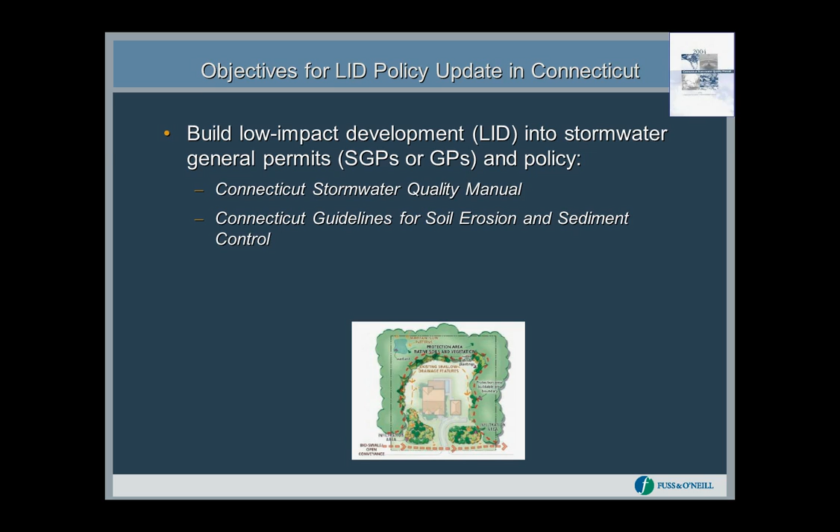The Connecticut Department of Energy and Environmental Protection wanted this to be a partner-driven process. It was very important to them that the folks in the regulated community were well aware of what the standards were, how these standards were going to get implemented, and that these groups of folks were essentially on board with what was going on.

The first task in this process was to develop a list of partners. We developed a list of over 50 diverse statewide partners to work with the Department of Energy and Environmental Protection to review and incorporate low-impact development into their stormwater general permits.

The reason they were focusing on a wide, diverse group of partners was experience that had happened in a couple other states, particularly on the West Coast—California, Washington—where it had been attempted to bring low-impact development into general permits and statewide standards, and there had been serious objections from the regulated community, in some cases threatening lawsuits. So Connecticut was working to avoid that problem, essentially short-circuiting the issue before it starts by working with partners up front.

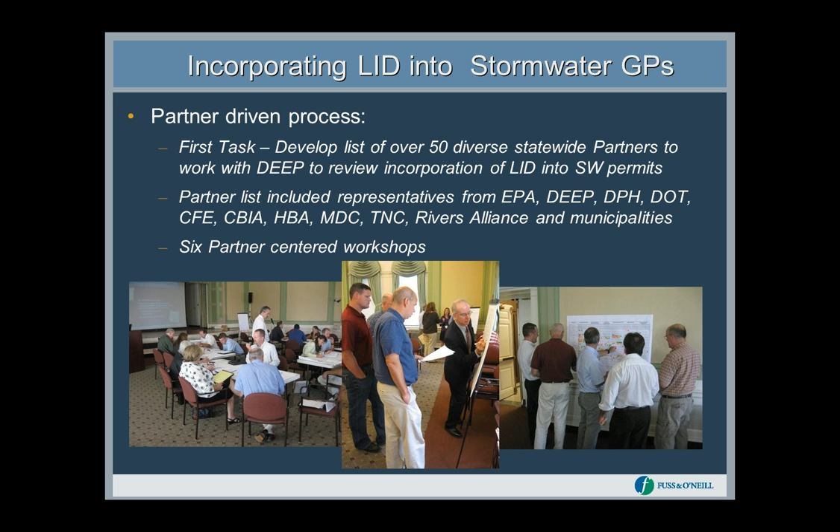We also included all of our deliverable products for the project on this web page, and this way it was very easy for the Department of Energy and Environmental Protection, before a workshop or at the end of a workshop, to send out an email to each of the folks who had been involved, each of the folks on their partners list, saying there's new information that's been posted and you can find it at this location. People could easily download it and, of course, make comments back to the department.

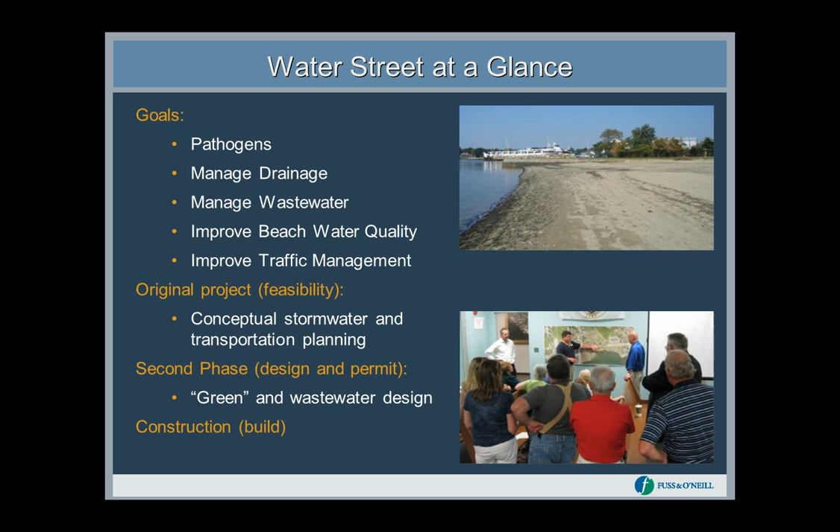But through this process, I think we probably came up with a better design approach. We worked closely with neighborhood folks in the area to really try to come up with an approach that would work well for them in terms of managing traffic and using stormwater infrastructure that would be aesthetically pleasing to them.

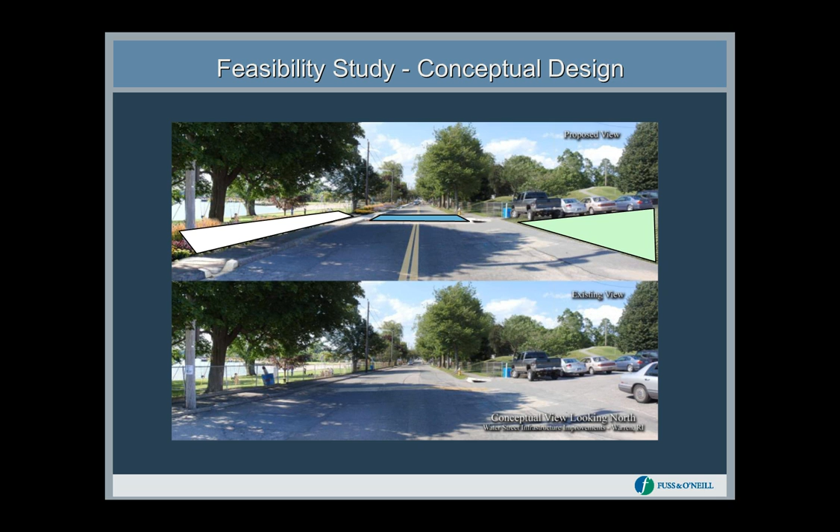Financing for Water Street. An important aspect of any project is, of course, being able to come up with financing for it. As is the case with most municipalities, the town of Warren, Rhode Island was not made out of money and needed to look to external sources to potentially gather some funding.

The initial stormwater, or wet weather and dry weather, studies that we did that identified the sources of pollution were funded directly through the town. Those amounted to about $20,000 up front.

The town was then able to leverage an existing non-point source grant, or a 319H grant, that they had, and reprogram it to work specifically on this project. It had actually been taken for another purpose, but it was close enough to this that they were able to reprogram it. We developed a feasibility approach that we reviewed with the town staff and later the neighborhood in charrette-style meetings. Ultimately they were able to take the results of the design work and bring that to the Rhode Island Department of Environmental Management and request an SRF loan.

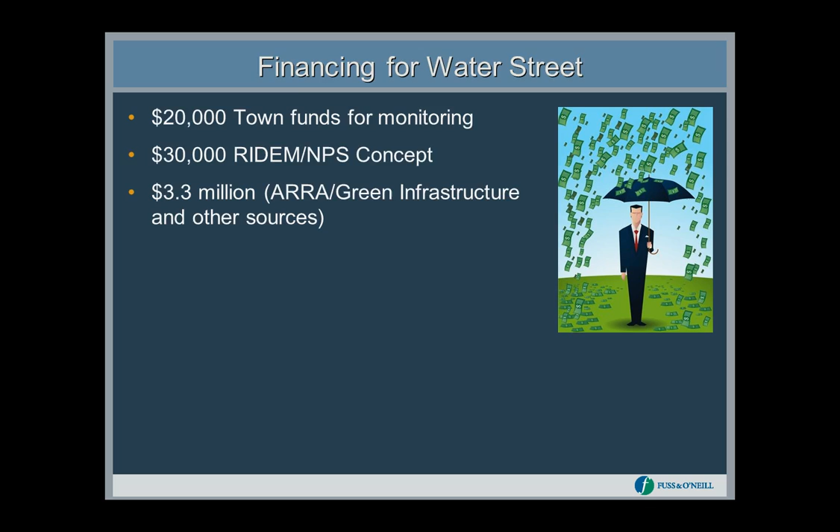A couple of key points about what made this project attractive to funders and to move forward with the town. First, a clearly documented pollution problem—all that work we had done up front, sampling and determining the sources, really made this an easy-to-explain project to the general public and to potential funders. Second, the importance of the water resource in this area: this is a town beach that had experienced significant closures, an area folks wanted to restore to its original or desired quality.

A clear implementation approach: we developed plans and designs up front that we were able to show people, showing exactly what it was that we wanted to do and when, and the kind of buy-in that we had on the project.

Demonstration of low-impact development for a green street. This is actually one of the very few green streets that have been implemented in the New England area. I believe it'll get built most likely this summer, and I believe it'll be the second one in New England overall. Demonstration of this kind of approach was something that I think was very attractive to funding agencies.

And then general agreement amongst stakeholders: we spent a lot of time working with the neighborhood, working with state and municipal authorities, and also with the Native American constituency in this area, as well as federal groups, to make sure that everybody was on board with this and that it would be a successful project.

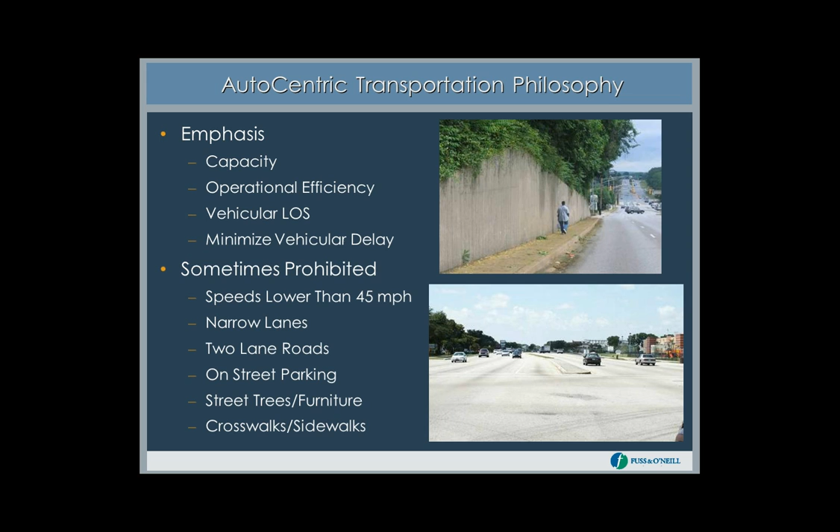So how have we started getting back to it? Well, the public has spoken, and people want to live in walkable communities. They want walkable areas. Our guidelines, a lot of the state and local design guidance did not allow that to happen under design standards. So what we've now done is, through the efforts of collaborations such as the ITE and Congress for New Urbanism, we've come up with sets of guidelines that are specific to these walkable urban areas.

Whenever we try to apply highway standards in these urban areas, we fail miserably from a people standpoint. We do a great job in moving cars, but that's pretty much all. So a few years back, Institute of Transportation Engineers and the Congress for New Urbanism got together and decided to develop a set of guidelines that really go toward helping us build walkable facilities in more urban areas.

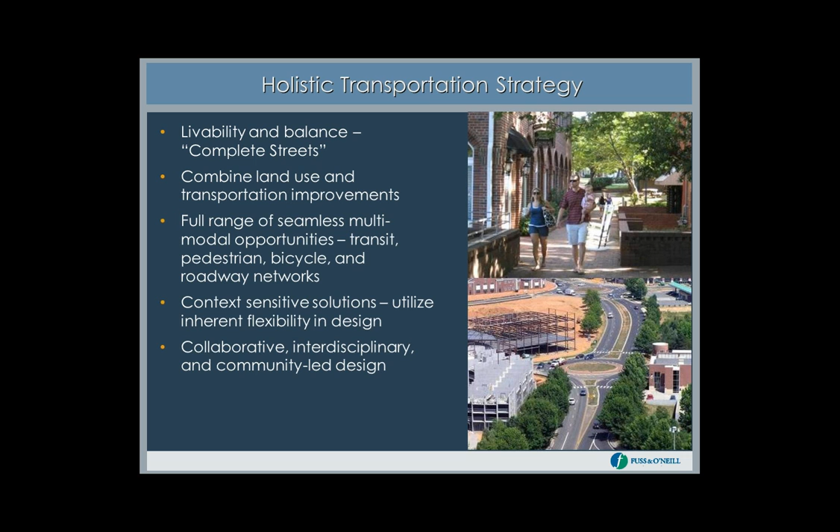So whenever we boil it down, complete streets really are about respecting the overall context. They're very well connected, not just from a roadway network standpoint or connectivity for one mode, but connectivity between modes, really wanting to eliminate those seams if we can. We go beyond the travel lane, beyond the pavement, think beyond the curbs, and start to identify these different realms and tailor them to each of the users, whether motorized, non-motorized, walking, biking, or buses, making the interfaces between all of those much more seamless.

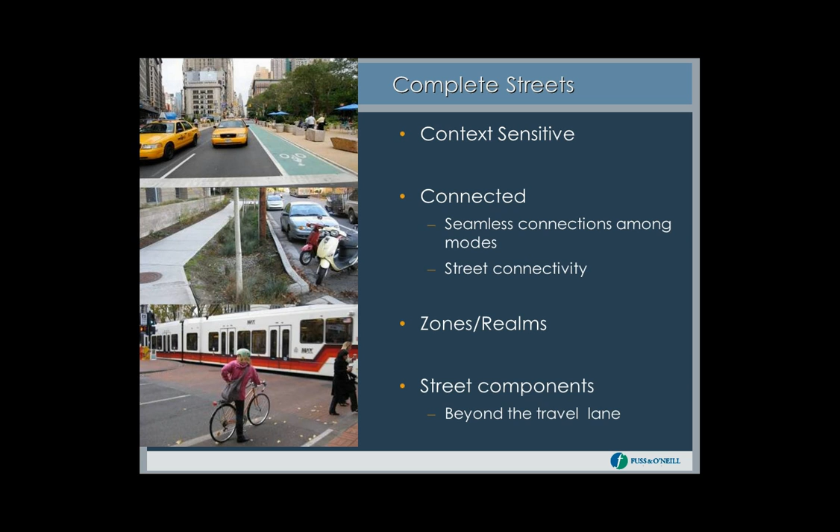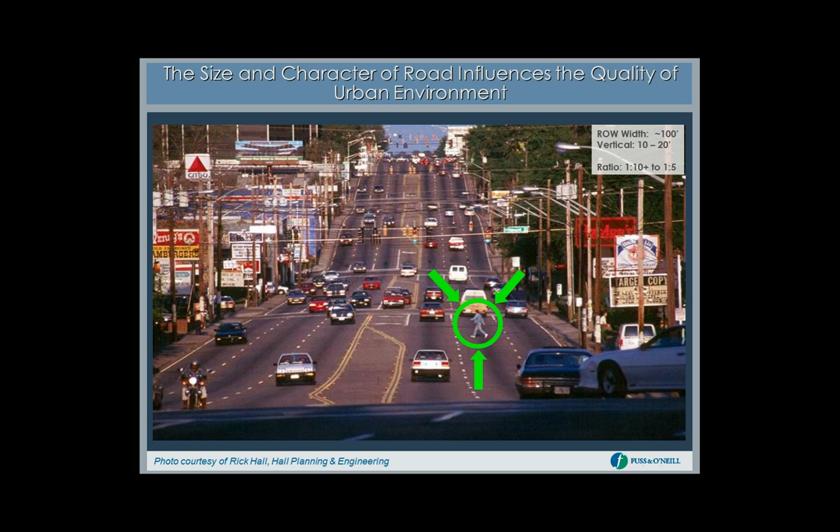One of the other things we start to look at within the component of a street is how people feel comfortable on a street. It really is about getting the vertical and horizontal distances correct, because people want to feel enclosed. By addressing the height of the land uses on the street edges and making an appropriately sized street, you can really start to make people feel a lot more comfortable within the space.

We're doing a lot of this through integrating the transportation engineering along with the land use in the realm of form-based coding as well.

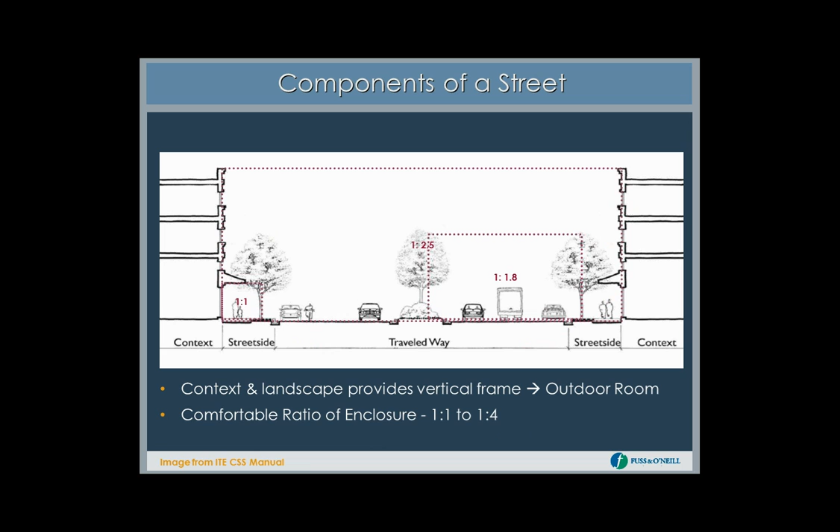And again, it really does come back to respecting the overall context. A road in a very rural area should and will be very different than one in a much more urban area. It's not to say that one can't adhere to the principles of complete streets, because they certainly all can. It's just how you meet those criteria can be different depending on where you are within a transect.

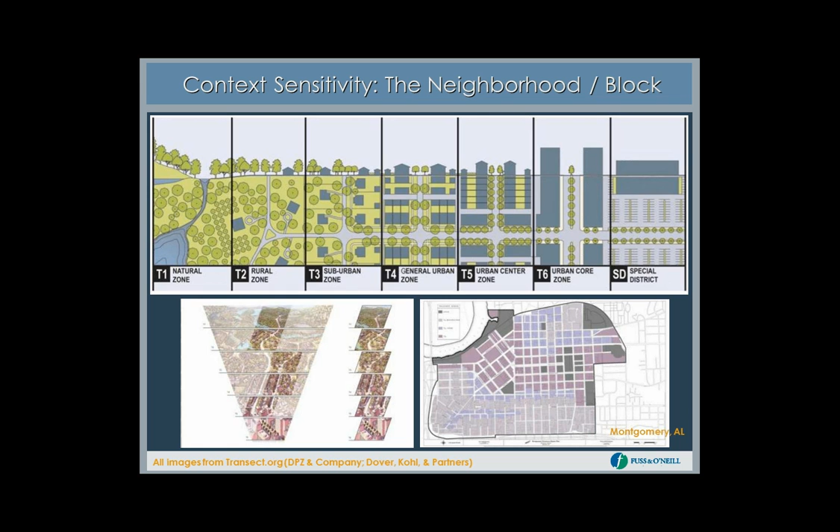Some of the ways that we're actually able to integrate and implement these kinds of streets are through land development ordinances and form-based codes. We actually code street typologies right into a lot of our code work, so that these different typologies really do respect and respond to the overall built and natural environment. We definitely go beyond the arterial, collector, and local street functional class, looking at many tailored classifications of roadways that have flexibility built in for the land uses adjacent to them, but all of them incorporate principles of walkability and complete streets as well.

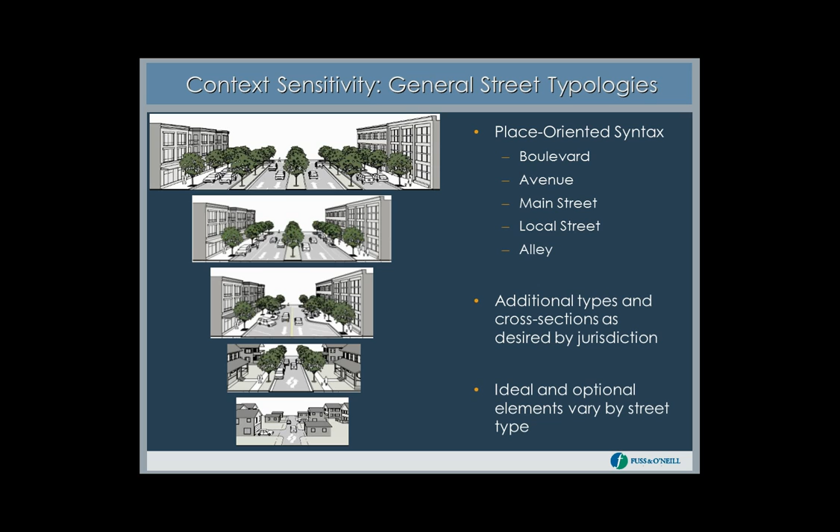So again, really looking at the different zones on the street side to be able to provide those spaces as well. We make sure the street side spaces are built right into the design because we look at the overall holistic streetscape. We define these zones: a transition zone from the vehicle space to an amenity and furnishing zone, to the walking zone on the street side, and then to a frontage zone where people can shop or dine outdoors and interact with the rest of the community.

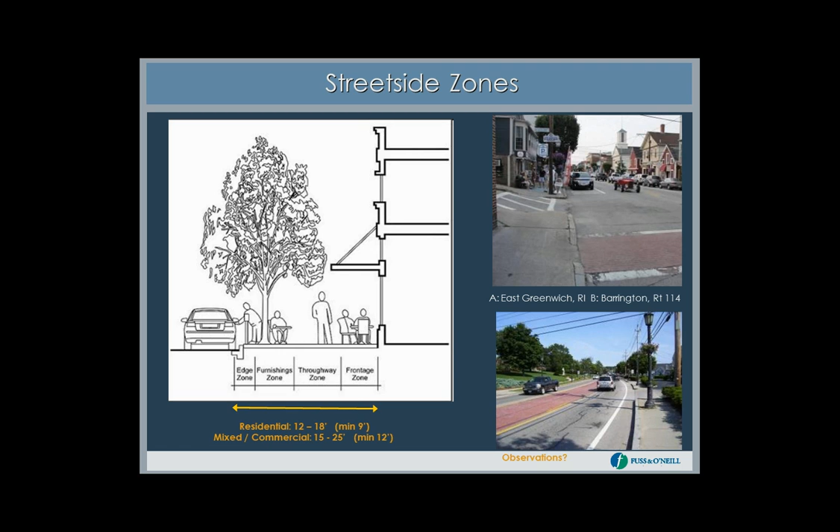But to do that, we have to make sure that we are inherently walkable and that we're not creating conflicts between motor vehicles and pedestrians. We want to make sure they're as safe as possible, and that within these zones we provide for closing those gaps between walking and motor vehicles and other modes of transportation.

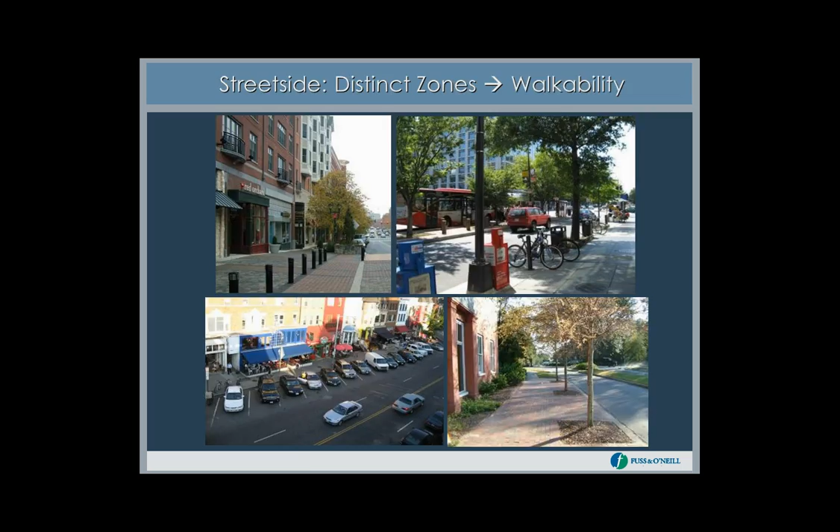One place that we've really come a long way in the past few years is through our design of bike facilities, recognizing the bicycle as not just a recreational mode of transportation, but a viable form of transportation for commuters as well. Some guidance we've recently received is from the bikeway design groups at the National Association of City Transportation Officials, NACTO. If you haven't seen the NACTO Urban Bikeway Design Guide yet, check out their website because it gives us great guidance on the range of facilities we can incorporate.

It really does go beyond bike lanes and signed routes. We can now use sharrows. A lot of cities are starting to experiment with cycle tracks, and it's cities outside the rarefied airs of Portland, New York, and D.C. Even smaller cities are doing that, and we're finding ways to reallocate assets such as drainage corridors or utility corridors to create more urban multi-use trails.

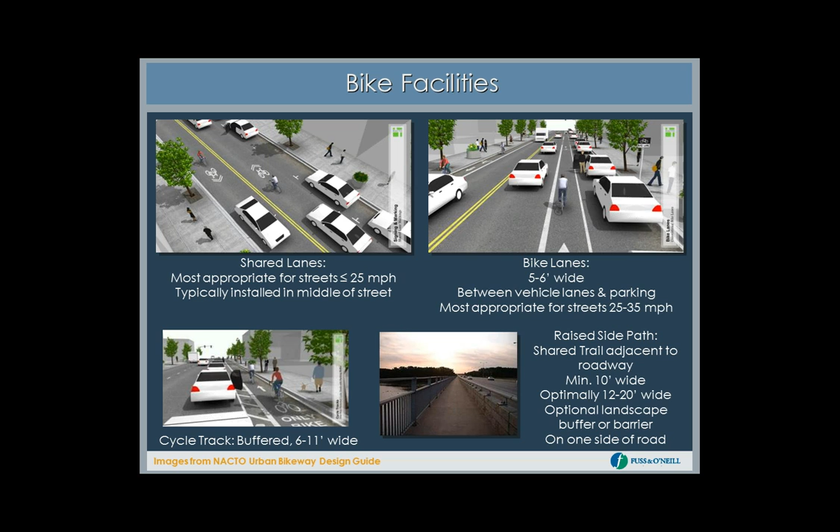We've also changed our thinking somewhat with regard to vehicle travel lanes. It's interesting that traffic engineering is one of the only math-based sciences where 1 + 1 does not necessarily equal 2 — a 4-lane road cannot carry as much traffic as 2 separated 2-lane roads. This allows us to explore things like the 4-lane undivided to 3-lane divided road diet, with similar road carrying capacity, much higher safety, and the ability to reallocate that pavement asset for other uses such as bicycles. By reducing lane width, we can also reduce speeds.

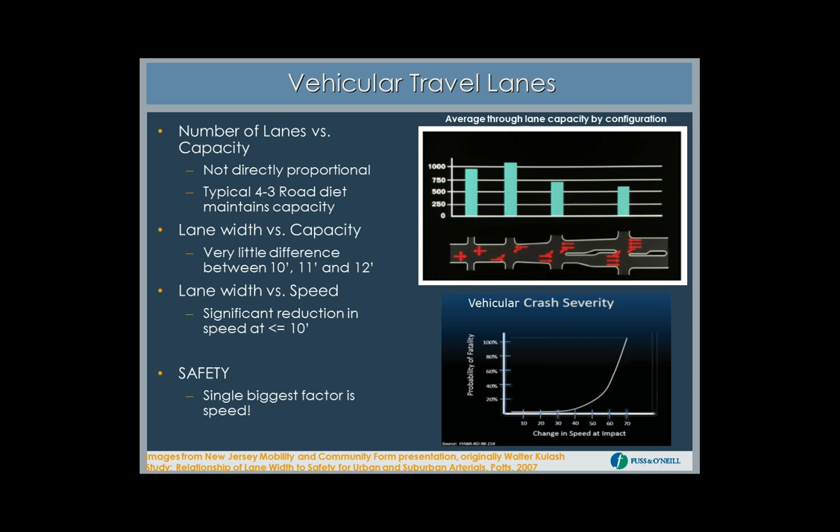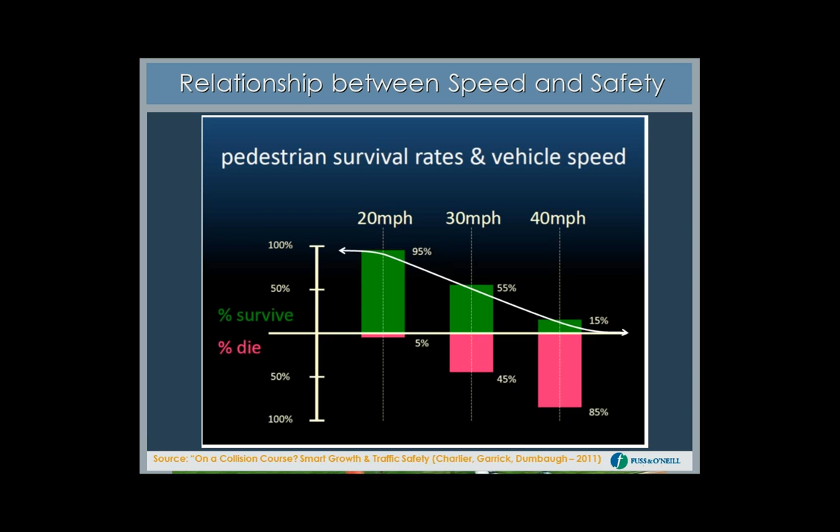Whenever we get down to the safety factor, the biggest issue is vehicle speeds. As a pedestrian, if you're struck by a vehicle at 20 miles an hour, you have about an 85 to 95% chance of survival. That drops to 15% when you double the speed of the vehicle. It's kind of like Usain Bolt running right at you in lane number 4 and running right over you — you can imagine what kind of collision that would have.

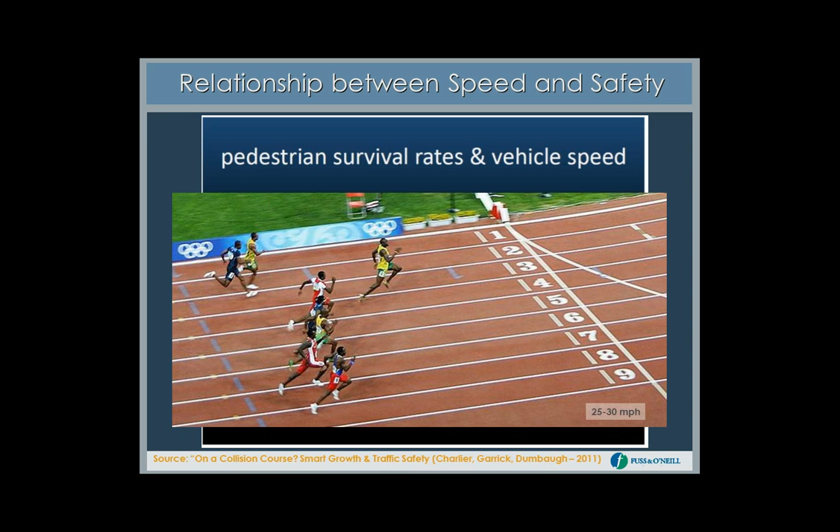Another element of complete streets is the idea of getting medians, landscaping, and streetscape — golden opportunities to dovetail into more green streets principles like rain gardens, bioretention, and bioswales, and we're seeing that kind of use started in a lot of places.

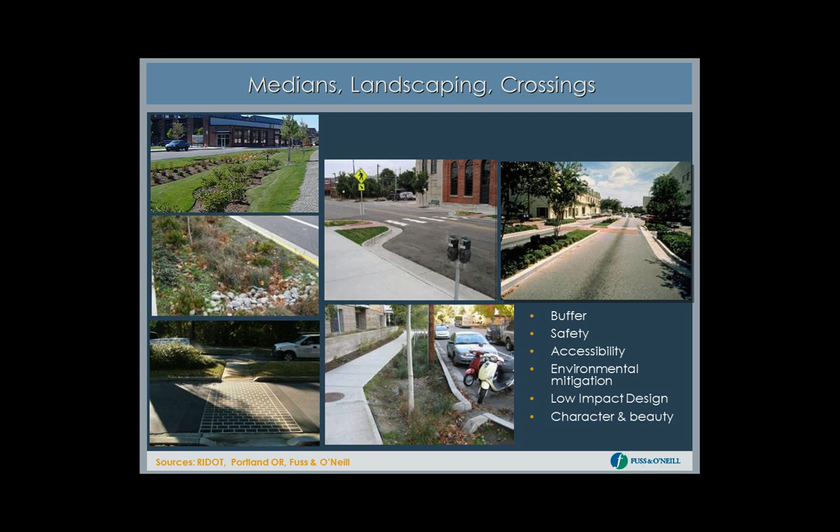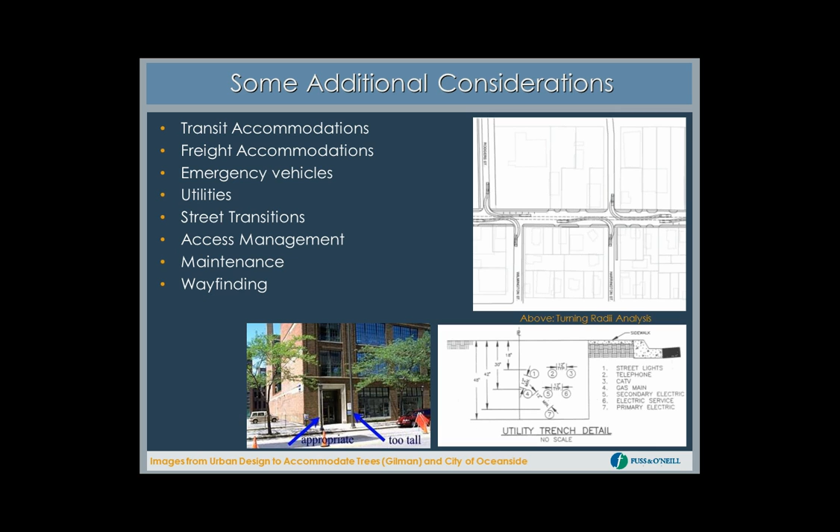We want to make sure we accommodate all the other issues — transit, freight, and certainly emergency vehicles. Fire departments are learning that they can downsize vehicles and get more multi-use to serve some of these areas. We also make sure to handle our transitions, understand our maintenance, and make sure people know where to go with wayfinding. One way we put it all together is through coding, and when we combine all these elements, we can come up with really, really great streets.

So who's actually doing it? I'm showing some slides here of some unusual suspects. Charlotte is generally recognized as one of the leaders in doing complete streets. But certainly New Haven, Connecticut is taking it to the nth degree, actually taking down a freeway and reconnecting the street grid with the Route 34 downtown crossing project.

Some other larger cities haven't necessarily been known for walkability or complete streets. Memphis, Tennessee is really becoming one of the forerunners of this bicycling movement. Memphis is on track to be one of the first cities in the southeast to do a cycle track project — a two-way cycle track connecting their largest urban multi-use trail to their signature Midtown park, Overton Park.

Then there are some unlikely candidates. Russellville, Arkansas, a small town of 20,000 about halfway between Little Rock and Fort Smith on the I-40 corridor, is actually doing a complete street project to connect their university with downtown on the heels of a downtown master plan. That would be a cycle track using the separators from the travel lanes as rain gardens to assist with stormwater.

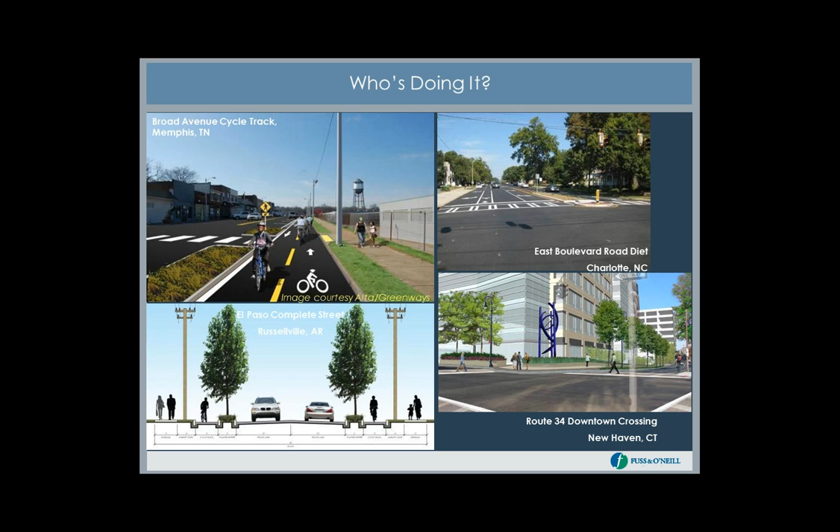So how do they get it done? Some of the funding sources available — a lot of places we're working with are using things like tax increment financing, business improvement districts, targeted sales tax, or even local option sales taxes to do these kinds of complete streets pieces. Voter-approved bonds are certainly a mechanism by which Charlotte does most of theirs.

There are private foundations, such as Bikes Belong, that offer both financial and technical assistance to communities trying to do these kinds of things. There are also federal grants and funding programs, and one thing we're seeing is communities using local funding sources as leverage for matching federal grant application requirements. Finally, public-private partnerships on larger scale development-driven initiatives are certainly ways to get that done.

So it's an exciting time to be a traffic engineer working in complete streets. I appreciate your attention, and I look forward to any questions. I'll turn it over to Caren.

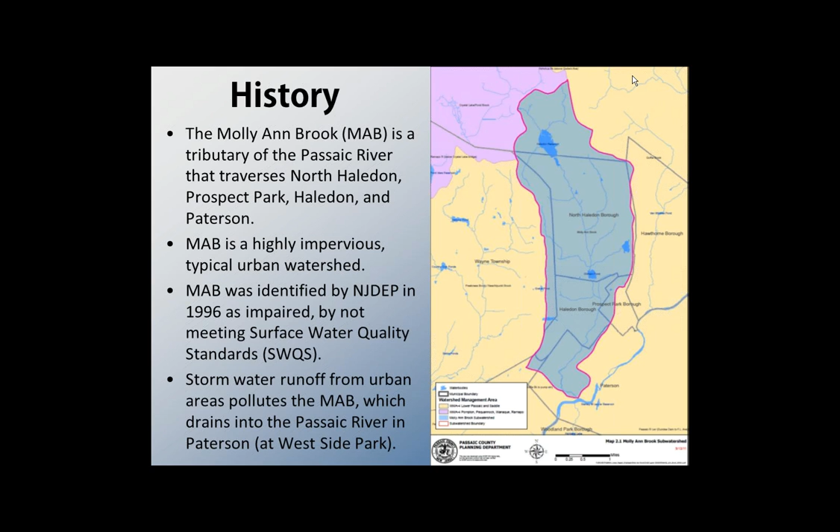So the question: can the Molly Ann Brook be improved? And the resounding answer is yes. The watershed management plan identifies several best management practices, and we decided to implement two of the non-structural ones. The goal was to enhance, protect, and restore the surface water quality of the Molly Ann Brook and its tributaries.

So the two non-structural best management practices we chose were funded after the management plan had been approved by the New Jersey Department of Environmental Protection. We applied for another 319H grant - that's Clean Water Act funding - to purchase rain barrels for distribution free of charge to residents within the Molly Ann Brook watershed.

As you know, rain barrels capture rainwater that would otherwise just run off the roof and into the storm drains and then eventually into the waterways. It's non-potable water, but it can be used for watering your lawn or garden, washing your car, washing your pets, or other uses. I've used my rainwater at home to mix cement for a small cement job.

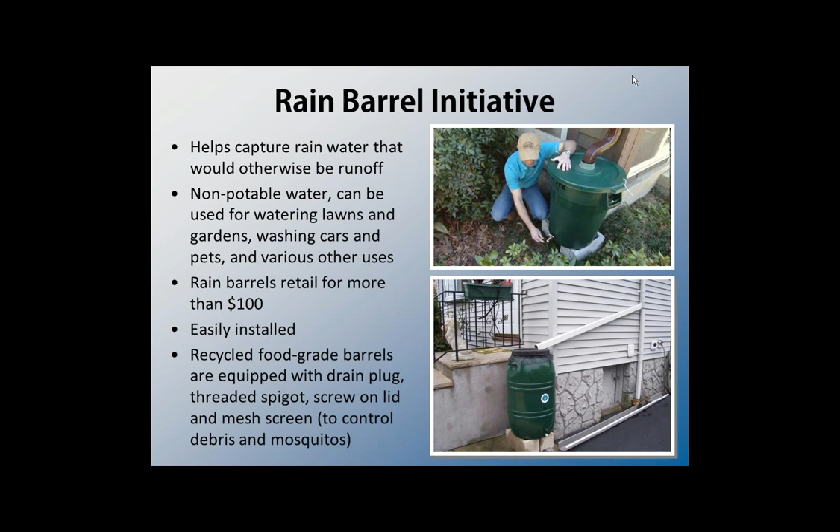Before actually receiving the rain barrels, we distributed flyers, had press releases in the paper, newspaper ads, information on the municipal and county websites, public meetings, and a watershed ambassador who was also working on classroom demonstrations.

They were distributed to these four municipalities at no cost to the residents. We have two paid interns through the grant who have worked very closely with the residents who've received the rain barrels, and they monitor and address any concerns the recipients have.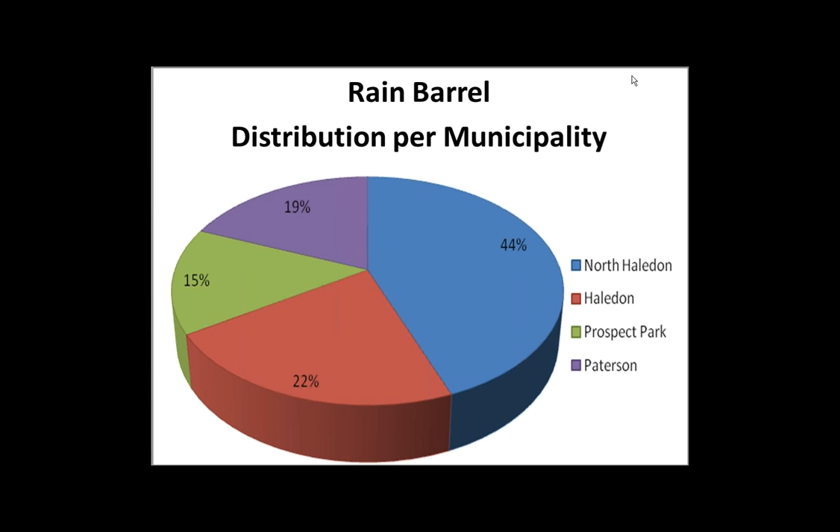This shows the information that we got from Rutgers using their GIS, telling us where to target, and this is what was created here at the Planning Department, showing where the barrels are located, so it makes it easy for our interns to go out and check and interact with the residents.

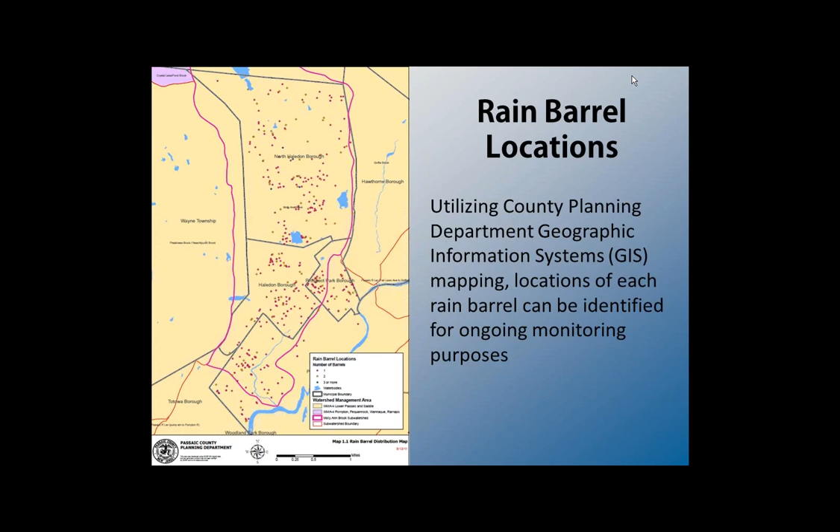Here's an example of multiple barrels that are connected so that when one is full, it'll overflow into the others. I'm hoping that we get some rain soon because it's been pretty dry here in New Jersey.

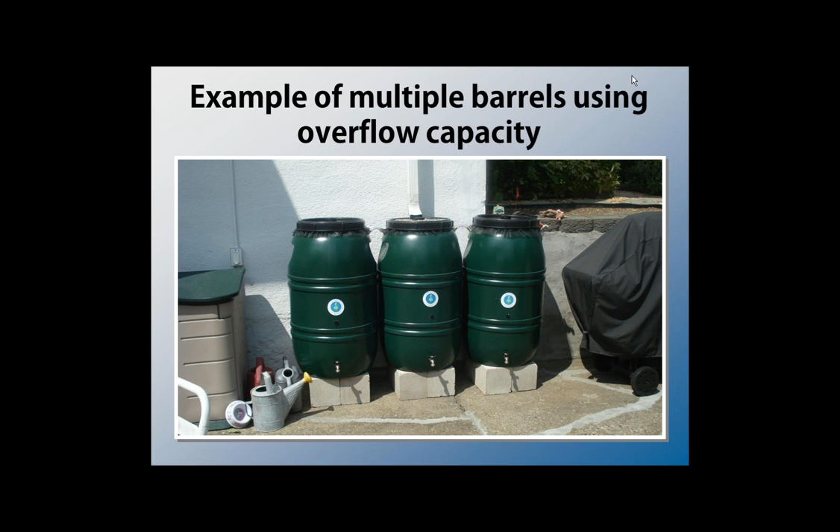So the benefits to rain barrels are, again, reducing runoff pollution. They save you money on your water bill. We did receive feedback from gardeners who said that the gardens they watered with rainwater grew better than the stuff they were growing with tap water. They provide water during drought conditions, and it actually seemed, even though this wasn't our purpose, to reduce localized flooding from major storms.

The environmental education aspect to local students was key. Kids would go home and talk to their parents about them, and it was like the kids were really pushing their parents to go pick up a rain barrel.

And we are hopeful. We've seemed to be getting a signal from the NJDEP that they would like to implement this program as a statewide program throughout the state of New Jersey, especially in those urbanized areas. And our recipients have seemed to be more interested now in little changes that they can make to improve their environment.

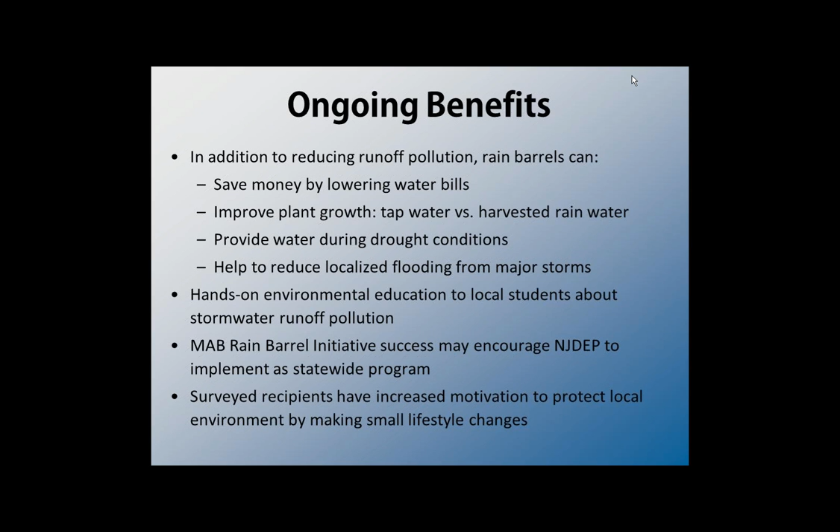I'm going to turn this over now to Amy Rowe to talk about rain gardens.

Hello everyone, I'm Amy Rowe. I am the Rutgers Cooperative Extension Agent, Environmental Agent for Essex and Passaic counties, and I've been working with Kathleen at the Passaic County Planning Department for a little while now, and one thing that Kathleen didn't mention is...

...that the grant with the rain barrels was so successful that the DEP had actually given extra money to implement a second best management practice for stormwater. And so this is actually phase 2 of the whole project, and we were tasked with installing rain gardens around the Molly Ann Brook municipalities.

And so I just want to give you some background on what is a rain garden. Some people know them as bioretention areas. They're basically just shallow landscape depressions that can capture, treat, and infiltrate stormwater before it even becomes runoff. So you're handling that stormwater at the source.

And so one of the great things about rain gardens is that you have a beautiful addition to your landscape while also capturing stormwater runoff, so reducing stormwater quantity, but also improving water quality. And so you can see from these pictures that the garden doesn't have to look fancy or anything like that. No one even has to know that it's a stormwater best management practice. It just looks like a regular garden, and it can take the feel of any kind of garden you want.

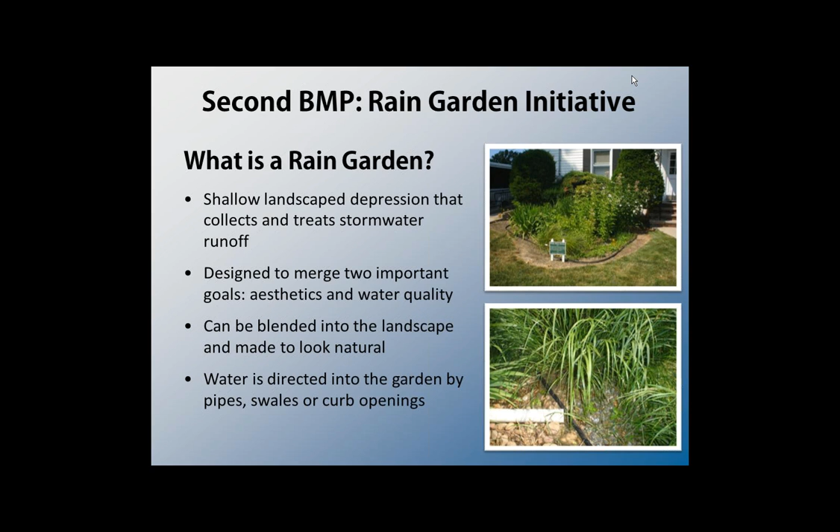So as I stated before, the benefits of rain gardens are that you are handling stormwater volume so that you have reduced stormwater quantity in your storm sewer system, which leads to reduced stormwater going out to the receiving body. But you're also improving the water quality.

...of the stormwater as it's moving through the different layers of the rain garden. So plants can uptake certain pollutants, then the different layers of the soil can actually filter out pollutants as the water moves through from the top layer down into the native soil down below.

And rain gardens can also be a great way to recharge groundwater, which provides base flow to our rivers and streams, especially during dry periods.

But the rain gardens are very efficient at removing some pollutants. They have very high pollutant removal efficiencies for solids, for metals. Even some organics can be removed by rain gardens because of microbial activity.

And the jury's still out on nutrient removal. There are some specific designs for rain gardens to help remove nitrogen and phosphorus, but a typical unengineered rain garden may or may not be helpful at removing pollutants. A rain garden can also be used to prevent wet spots elsewhere on the property.

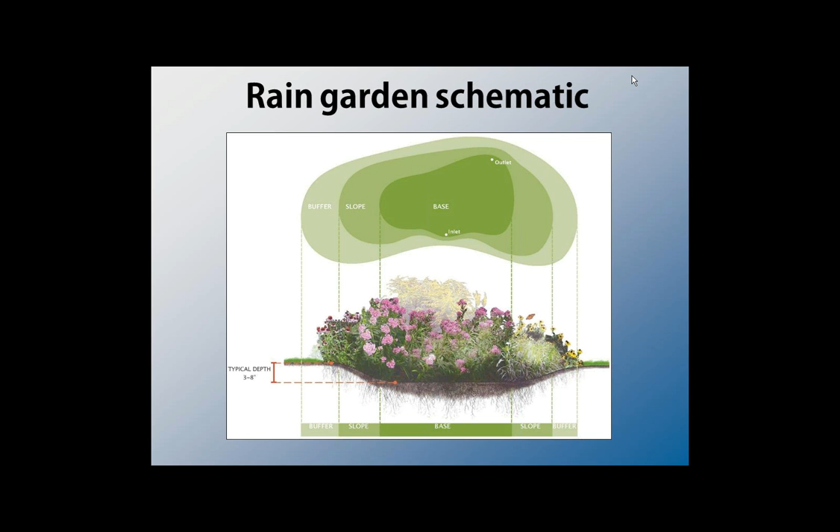So I'll turn it back over to Kathleen for the conclusions here.

So the Rain Garden Initiative is an ongoing project. We'll be installing, I think, 5 or 6 more rain gardens this spring on public property. And again, Amy was very helpful in gathering data and showing these very impressive results.

We had over 600 barrels that prevented nearly 2 million gallons of stormwater from directly entering the watershed. The 3 installed rain gardens will treat a total of 50,000 gallons of precipitation per year, and of course that will increase as we continue to install more rain gardens.

Thank you, Amy, for reminding me. We had originally applied for a $70,000 grant from the New Jersey Department of Environmental Protection, and they liked the idea so much they gave us $100,000. So we were able to buy many more rain barrels at a discounted price, and with funding left over, we shifted the budget and modified the scope of work to include rain gardens. People have been thrilled with them, they're very attractive, and they're doing a really good job.

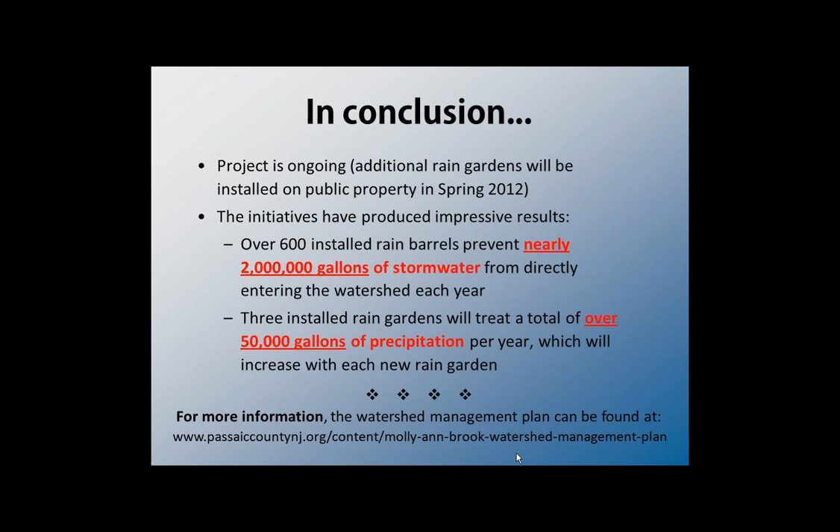So we're going to talk a little bit about wastewater and complete streets, which is sort of an odd component, I guess, but it is actually an aspect of development of any nature. Over the years in my career, I've seen that wastewater often was not an integral component in the original planning. With trends away from, over the last 20 years, more sprawl-type development, there really wasn't an issue. Around here in Connecticut, where most of my work has been, we've seen big 2-acre residential lot type subdivisions, and no one really worried too much about the wastewater. But there are issues out there, and it's really important to think about ways we can integrate this into our developments, whether they're urban, suburban, or village type settings.

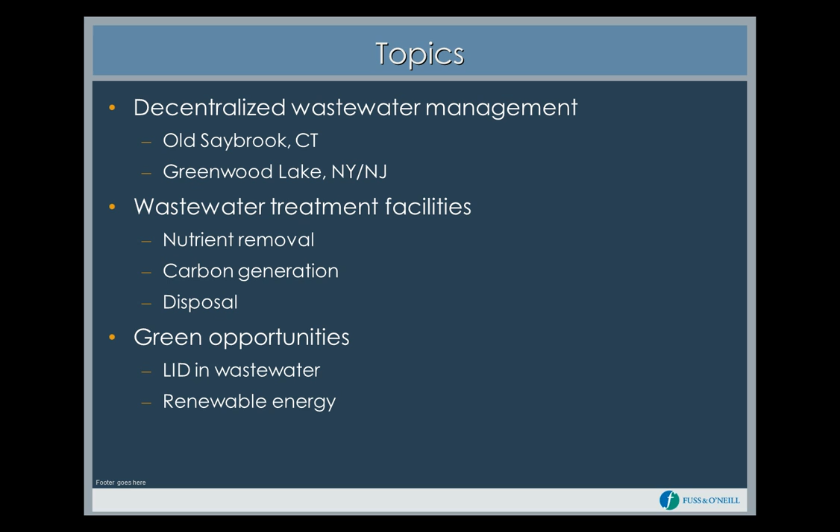Innovative or decentralized types of solutions, such as what I'm going to talk about with Old Saybrook. Decentralized meaning a solution other than a centralized treatment plant—kind of the opposite of the big pipe, probably some of you have heard of that. And then utilizing some low-impact design techniques, such as Jim and Kathleen and Amy have talked about a little bit. Hopefully that's intriguing—how in the world can you use that with wastewater disposal? I'll talk about some things people are doing with that. And then even renewable energy—there is a lot of energy in wastewater. That's the 4th category.

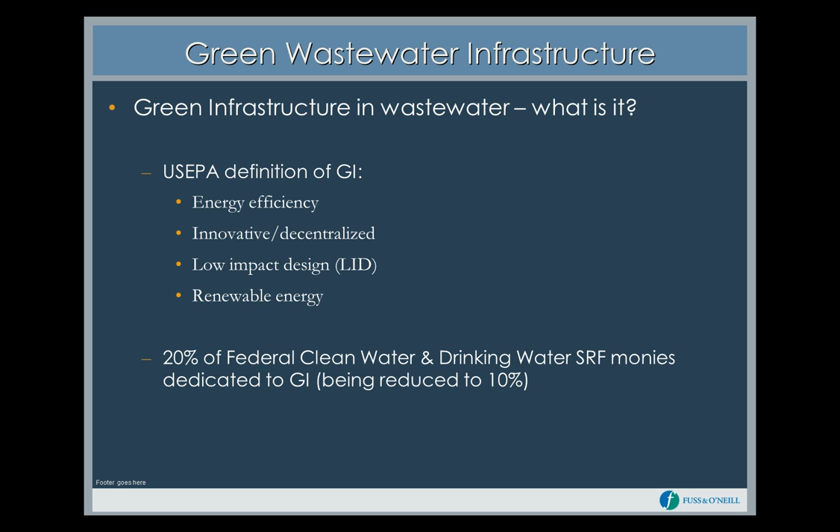Thank you. And then lastly, I'd point out that the federal EPA puts quite a bit of funding into clean water and drinking water SRF monies for the various states. In the past, 20% of that has been earmarked for green infrastructure type projects, and unfortunately that is being reduced to 10%. So that's trending in the wrong direction.

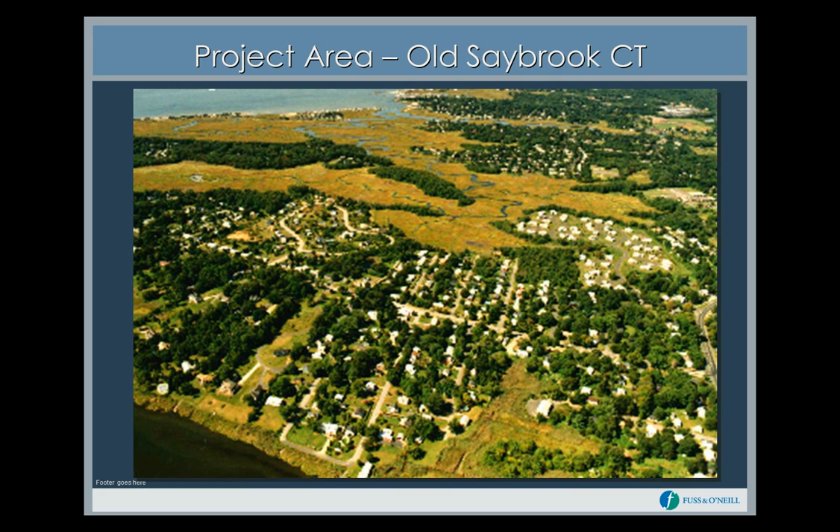It consists of older systems. Many of them were built in the 1950s, prior to the Public Health Code, so they're probably substandard with respect to current requirements. In addition, a lot of marginal land was developed just due to its proximity to the waterway, and it also has a high groundwater table, which is unsuitable for on-site septic systems.

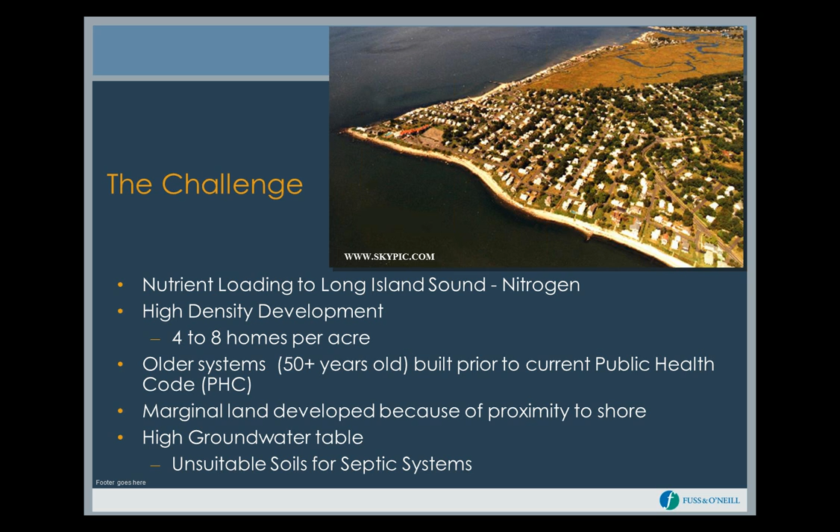So there were a number of issues here, and the town was dealing with this with the state for quite a while, actually trying not to deal with the solution that the state wanted to impose on them, which was a regional wastewater solution where 3 towns would combine and build a major wastewater treatment plant that would discharge into the Connecticut River. The town of Old Saybrook had significant concerns with that solution, not least of which was their worries over such a solution inducing additional development within town and significantly changing the character of the community.

So they litigated this for some 20 years with the state, and finally they started a mediation process, and a very unique and innovative decentralized approach was developed.

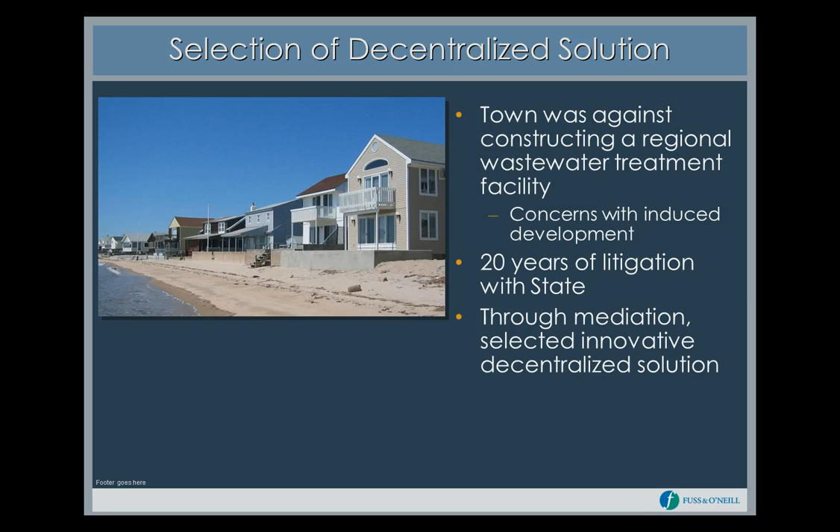Hey Virgil, I'm sorry, your audio is still wavering. Just wanted to let you know if there's anything you could do to make it a little more crisp, we're still getting comments on it. Sorry, yeah well this... Okay Chris, let me know in another minute or two. I tried a few things here, I apologize about that to everyone, it seemed to work fine during our dry runs earlier. Okay, so keep me posted, Chris. Yeah, you sound crisp right now.

Okay, good. Some of the key points of the approach was the development and delineation of a wastewater management district, which was a very formal delineation of different neighborhoods within the community that would be subjected to a different set of criteria and rules for managing wastewater issues there.

So additional upgrade standards were established that would be applied just to those properties within the wastewater management district. One of the concerns with any kind of approach like this with the regulators has to do with when you put in alternative treatment type systems, the operation and maintenance of those systems becomes very, very important, and that they be operated correctly so that they function correctly is a real key thing.

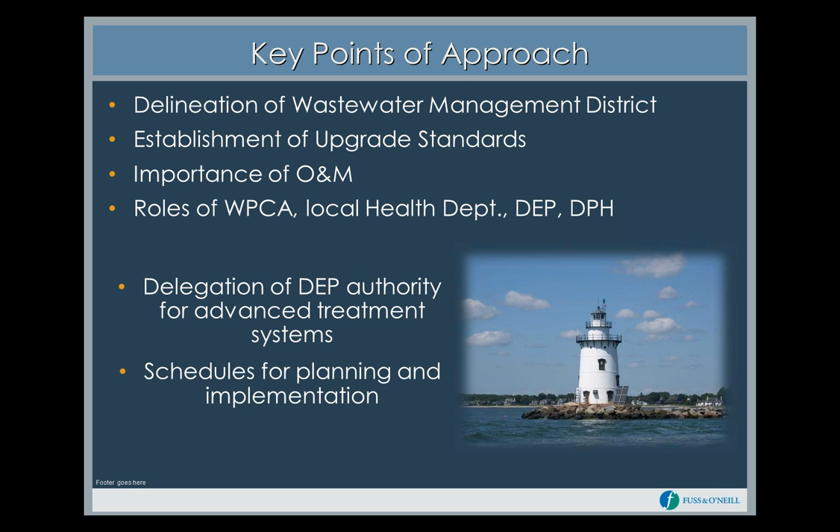Also, the DEP had to delegate their authority for the advanced treatment systems, which is something that they did not do happily or readily, but they did do it once the appropriate safeguards were implemented as part of the program. And of course, the schedule for planning and implementation was provided as part of the program as well.

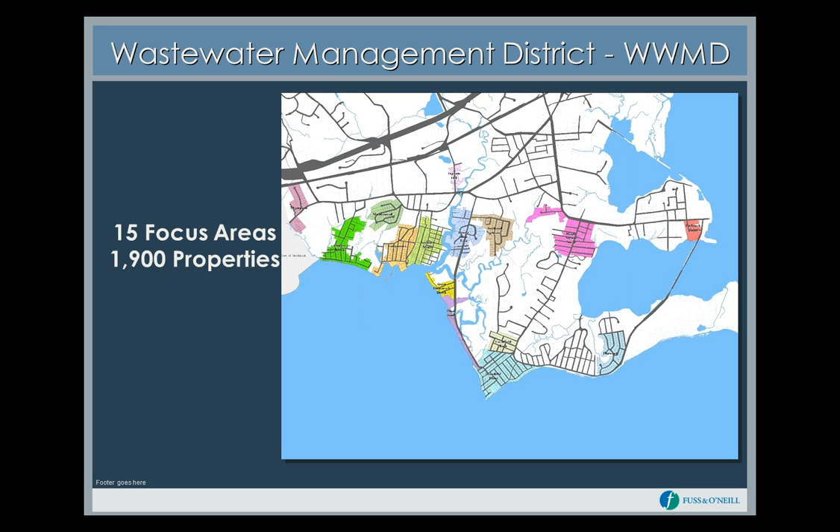The leaching systems would be upgraded to the extent possible, based on criteria negotiated with the various stakeholders: if you could achieve 2/3 or greater of the leaching area required by the public health code, then the system was okay, provided it met certain other criteria. If it didn't meet that, alternative technologies were required, and they were also required for all waterfront lots or lots adjacent to a water body.

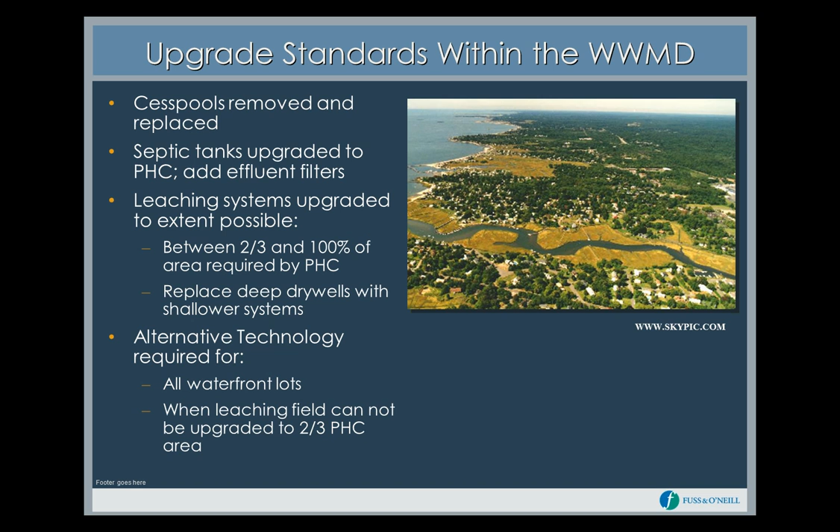So I would just advise everyone out there, should you think you have an application where a wastewater management district type of approach might be appropriate, just be aware that it is a long process, and it's a challenge to get the buy-in from all of the stakeholders involved.

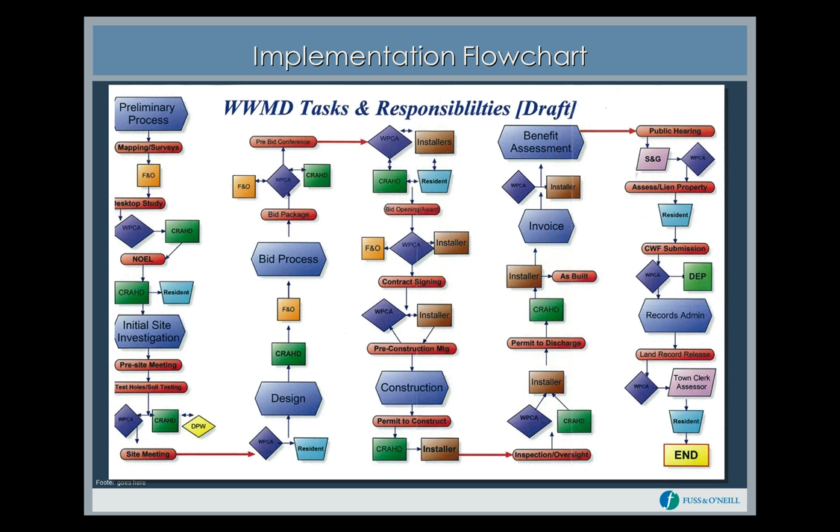And advanced treatment system, what is that? That was required for some 350 to 400 lots, or what we're estimating will need these. They're basically mini wastewater treatment plants, providing a higher degree of treatment than a conventional septic system.

We had a further requirement that the system's ATs must reduce nitrates by 50%. As mentioned, it's a combination of a mechanical process, but principally it's a biological process. They're essentially just wastewater treatment plants on a very small scale, which is a real challenge for them to consistently hit a high level of quality - which is one of the reasons we had very high O&M requirements in the program.

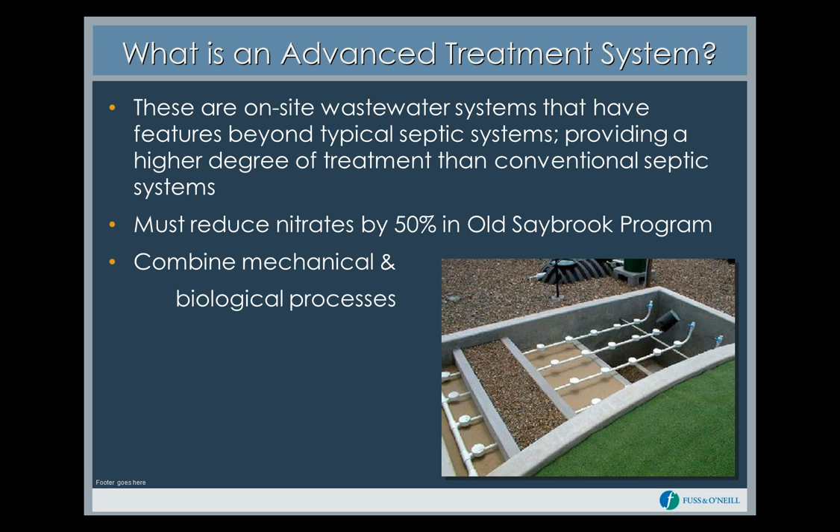Just to show some samples of the advanced treatment systems that were considered and are conditionally allowed within the program: things such as recirculating sand filters, and attached growth, which is an attached growth activated sludge type process. We have three listed: textile filters, peat filters, and trickling filters. Those are just different ways for the biological activity to function - they attach right immediately to the media.

We also have suspended growth type processes that were allowed, which are more like tanks where the biological growth is in solution. As mentioned, they're a smaller scale version of a regular conventional wastewater treatment facility. Membrane bioreactors are also allowed - a very effective way for wastewater treatment, although the energy costs are noticeably higher, which increases the operation and maintenance costs.

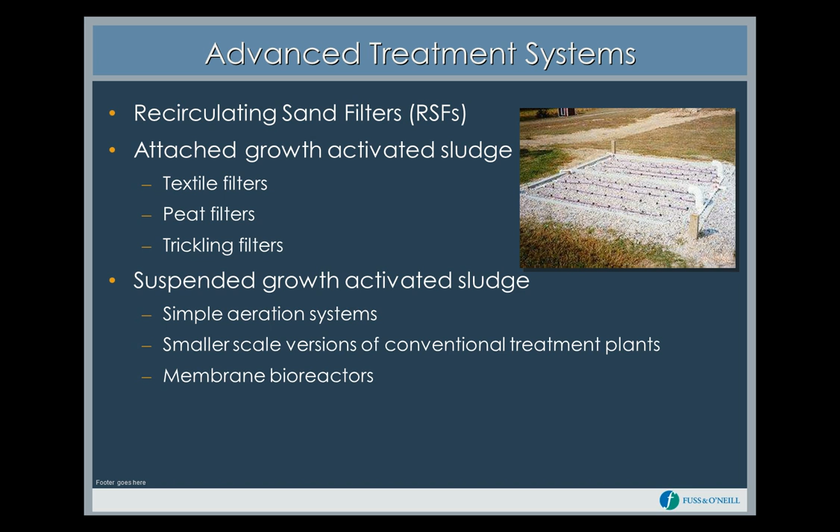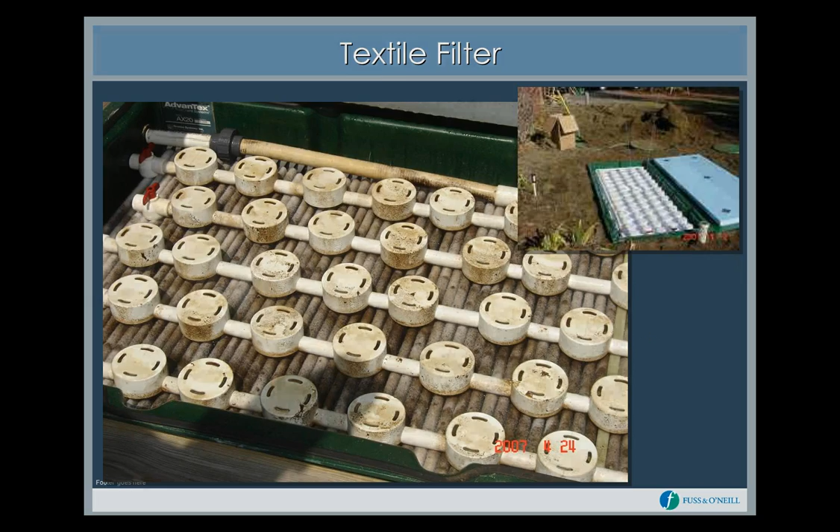Just as some examples, this is an example of an attached growth type of wastewater treatment system. There's a photograph on the upper right of it partially installed in the ground. This is a textile filter - it's partially elevated above the ground, but that can be landscaped.

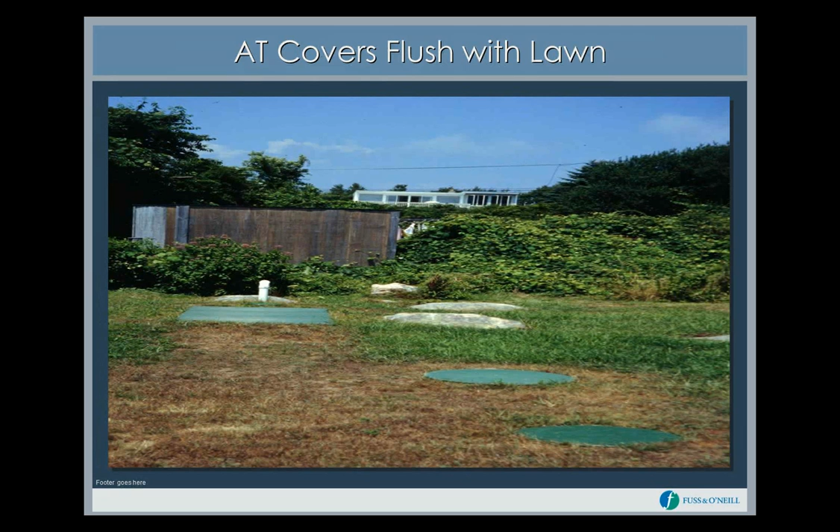This is just another picture to show some of the covers - of course, all the action is below ground. That's one of the advantages with Wade's work there, he has nice photographs of complete streets, and I have to say, as wastewater guys, we have all our action below ground - important nevertheless. It's a bottomless sand filter, very effective when you have high groundwater levels. And to show some of the landscape components - looks almost as nice as Wade's streets, don't you think?

Okay, I'm going to move now to Greenwood Lake, New York. Actually, it's a lake on the New York-New Jersey border in Orange County. The particular work that we did was on the New York side of the lake.

The lake was experiencing some eutrophication issues from phosphorus, pretty high elevated phosphorus limits. And phosphorus is found in detergents and in human waste.

This was a fairly extensive project. I'm just going to speak to one portion of it, and that would be the portion related to upgrading a residential home. Several homes were considered for this, and this particular one is the one that was selected. Some more photos later on.

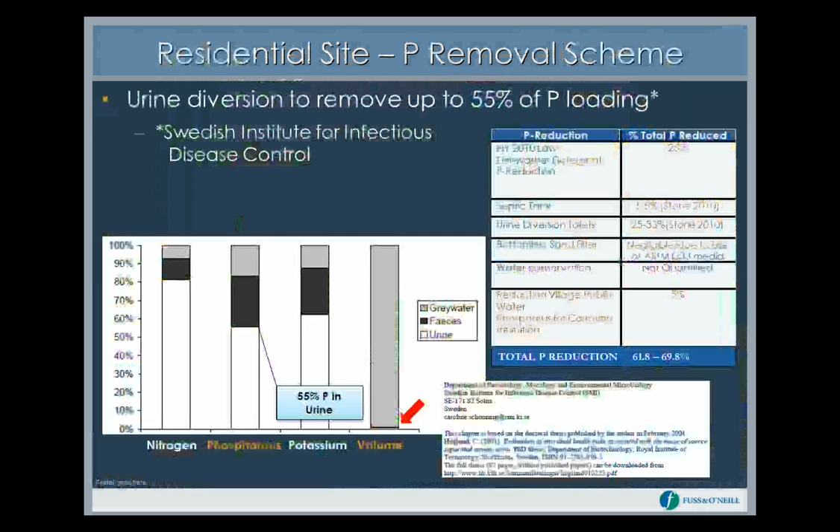The objective here was to demonstrate the use of urine separation type toilets, which is kind of a very foreign idea here in the United States, but it has been done quite a bit in different areas of Europe. And it does make some sense.

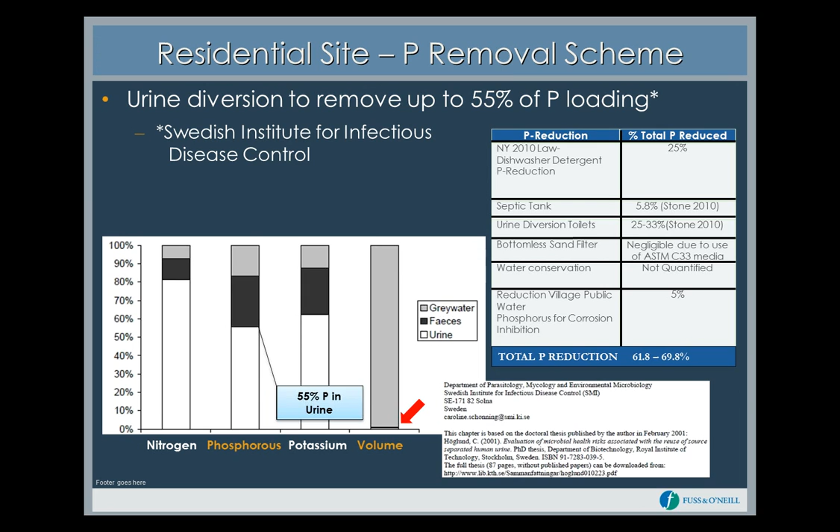Urine contains over half of the phosphorus found in the waste load. If you can separate it at its source, as those bar charts show, the white portion of the chart is the phosphorus found in the liquid portion. So if you can separate that out prior to it getting into the waste stream, you can prevent it from getting into the groundwater. So source reduction and separation is certainly an attractive way for wastewater management.

So this guy was pretty good in offering his house to actually try and demonstrate some of the toilets.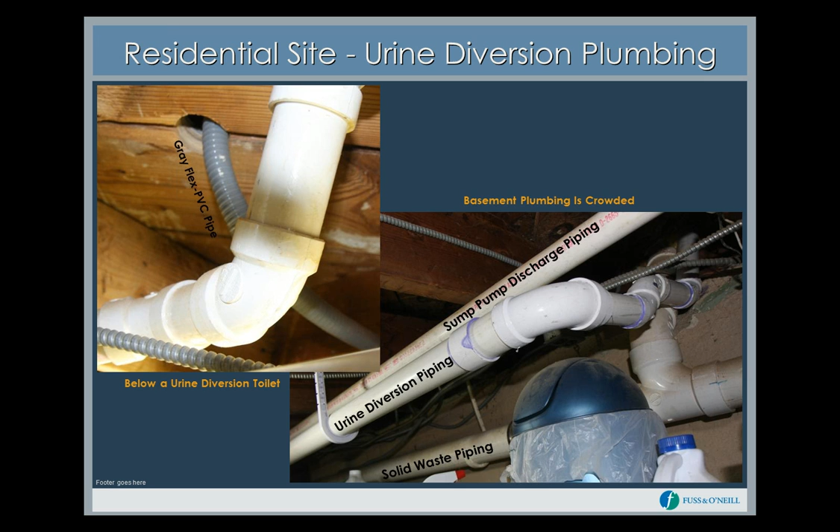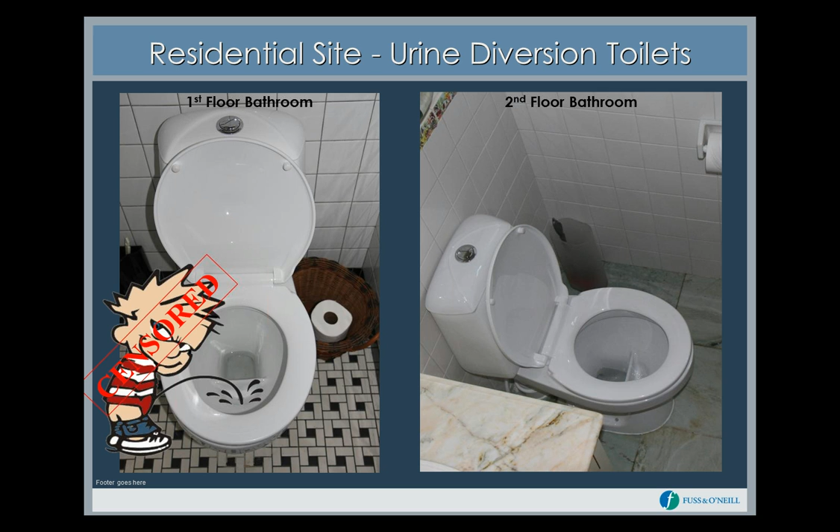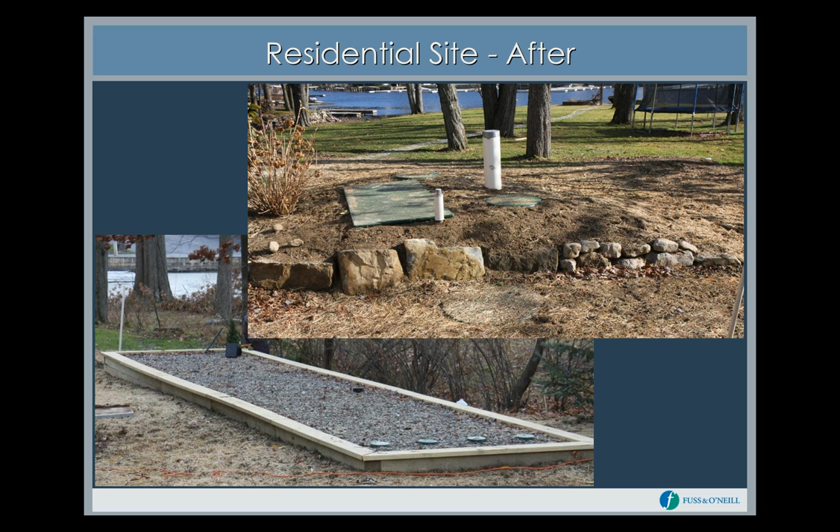These are actual pictures of the first and second floor bathrooms that were installed, and you can see the little shelf that's in the toilet for capturing the urine and doing the diversion. So that's an after picture. You see the tank shown in the upper picture. Just a really nice way of reducing phosphorus load.

Okay, so going from on-site types of applications, looking at wastewater treatment now. There are some very significant ways to implement green infrastructure with wastewater treatment, or certainly to get into some sustainable practices that are not traditional, not things we have traditionally implemented with wastewater treatment facilities across the nation.

There's opportunities with nitrogen and phosphorus. These two are being implemented in selected areas on a more limited basis. It's becoming more and more common. There's been a nitrogen removal program here in Connecticut for probably 10, 15 years now, and in other areas where different water bodies, nitrogen is a major issue. I'll talk some more about that.

But there's also process enhancements that can be done within the treatment process itself that would allow us to reduce our carbon footprint from these plants. There's a lot of carbon within wastewater, and a lot of it is currently just trucked away. So there's been certain plants we've been involved in where we've been maximizing the use of capturing that carbon and using it elsewhere within the treatment process.

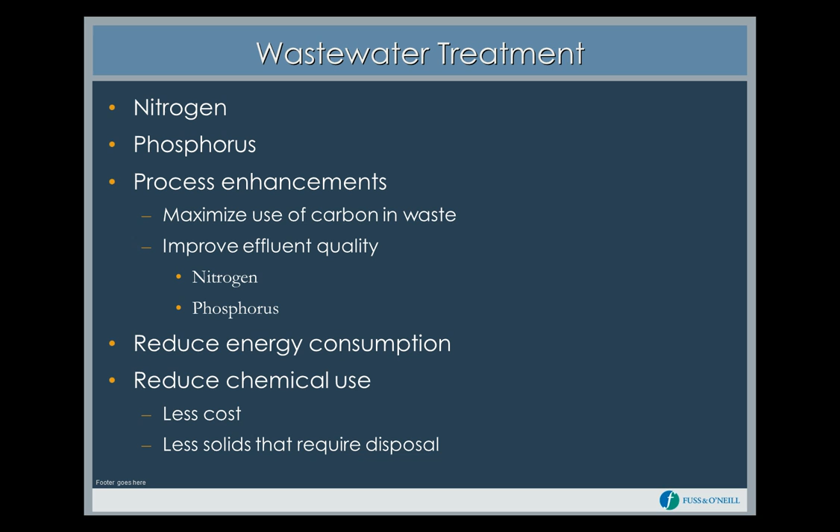This will help you improve your effluent quality with suspended solids and with nitrogen and phosphorus. It can reduce energy consumption at the plant, and it can reduce chemical use. Instead of doing treatment via chemicals, you can do it via biological actions, which reduces cost. You don't have to buy the treatment facilities for adding chemicals, and you use less chemicals, and you also have less material that has to be disposed of, which is another cost that can be reduced.

So looking at nitrogen, this is something we can do through a biological process, and it's released as nitrogen gas, a very harmless gas. It's 80% or so of the air we breathe. Through this process, by doing nitrification and denitrification, we are able to recover oxygen, dissolved oxygen, and alkalinity, which actually helps reduce some of the costs for operating the plant.

It's a very modest capital cost to reach levels in the 5 to 8 milligram per liter range, which is a significant improvement for most treatment plants. Most plants, the effluent nitrogen would be in the 15 or so parts per million range. So without a lot of cost, we can bring the nitrogen down to a pretty decent level, and save some costs by doing that.

The energy use is reduced as well, since less oxygen has to be pumped in to do the treatment. There's a picture there of a treatment plant here in Groton that does nitrogen removal down to those levels. You see in the center there are three rectangular tanks. The two tanks on the bottom are online, and the left-hand portion of those tanks is darker while the right-hand portion is lighter. That left-hand portion is where the nitrogen is actually being removed.

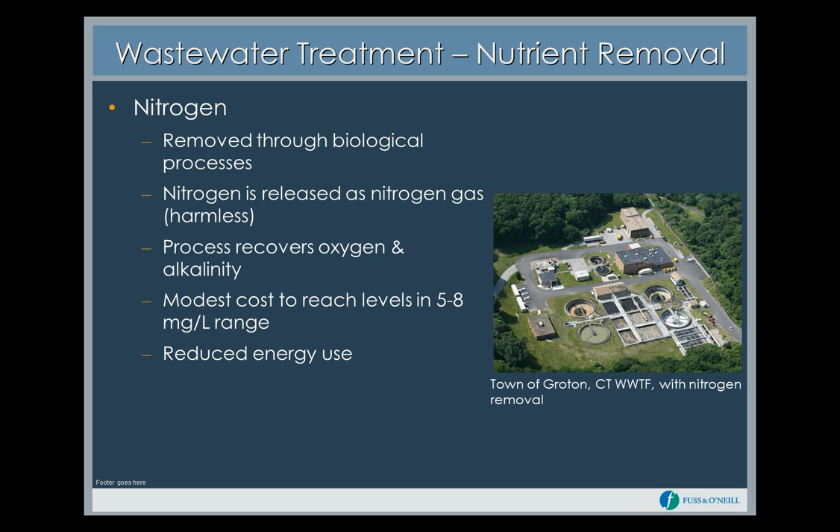With respect to phosphorus, it's a nutrient that's becoming more and more the focus of removal for wastewater treatment facilities. And there's a choice here, as with nitrogen, where you can remove it either chemically or biologically. The biological process is definitely superior to chemical precipitation in that you use less chemical and generate less solid material that needs to be removed from the site. You're also able to use some of the additional carbon that remains on site in the process.

So one of the ways we do this is we take the waste solids and generate volatile fatty acids in those tanks through a fermentation process, and then we take that liquid off and introduce it into the head of the treatment process, which helps reduce the phosphorus. The phosphorus will then settle out in our settling tanks, and that can be used to create fertilizers and other products.

As I said, the chemical addition is costly on an operational basis. Every day chemicals have to be added, and every day solids are being settled out that contain these phosphorus compounds, and you can't do anything with them other than landfill them, or in some places they incinerate those. So it's not the preferred way to go, and it also consumes more of the carbon that otherwise would not be consumed at the treatment facility.

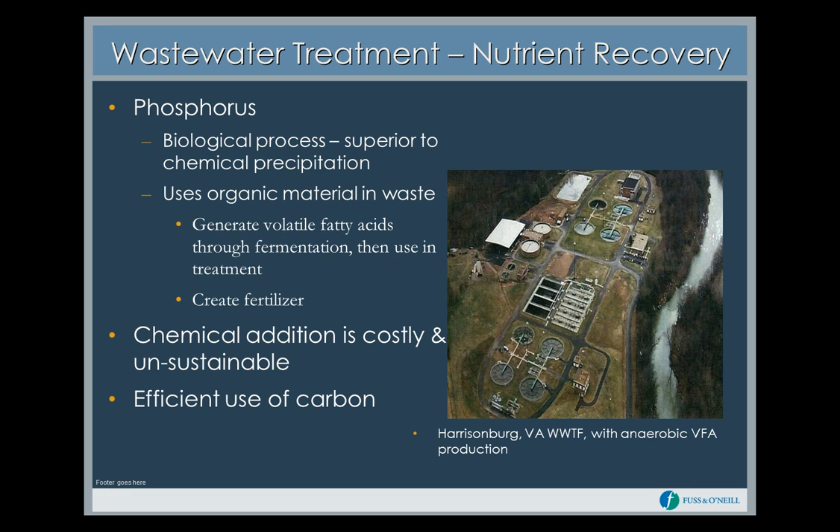Opportunities for renewable energy in our treatment facilities. An important point to note is that nationally, the energy consumed to operate wastewater treatment plants is estimated by EPA at 3% of the total energy used in the USA, which is a pretty big number. So if your town has a treatment plant, that plant represents a quarter to a third of the power consumption of your town. If there's anything we can do to reduce that energy cost, it's a huge benefit.

Here in Connecticut, we have some of the highest electric rates in the nation, so it certainly is a goal, something we want to do. But this is important anywhere, no matter what state you're in. One of the ways we do it is through doing some things with the digesters.

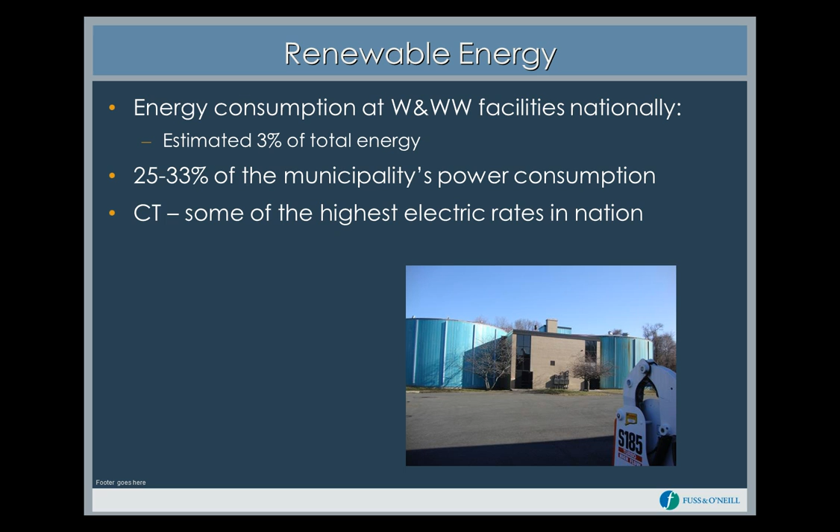Now, we call this combined heat and power, CHP. We're not done with it at that point - we take the exhaust gas from the engine or the turbine and recover the heat within that gas. We use that heat to run it through a boiler, where we could then use that heat to heat one of the buildings within the treatment facility, or we could use it to preheat the solids going into the anaerobic digester, to supercharge the whole process. This allows us to recover a significant amount of energy that would otherwise just be land disposed of or incinerated.

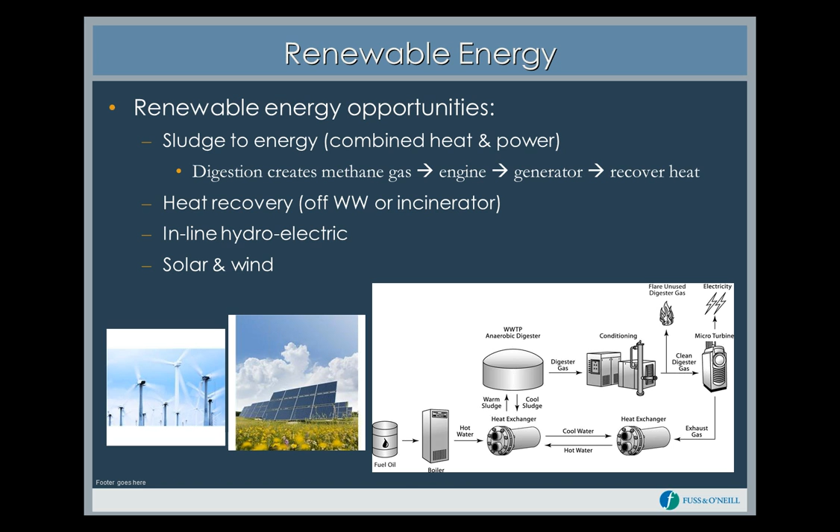So that takes us through the treatment plant. We talked about decentralized or non-centralized types of practices. There are some issues or opportunities for wastewater disposal that should be looked at or considered, and that are getting more and more consideration and application in recent years.

There's a couple applications like that we're assisting a town with right now here in Connecticut with an energy recovery facility.

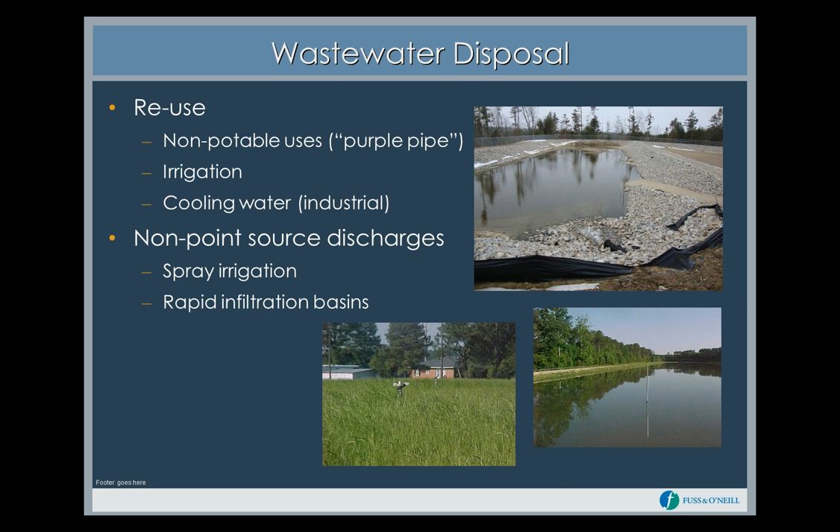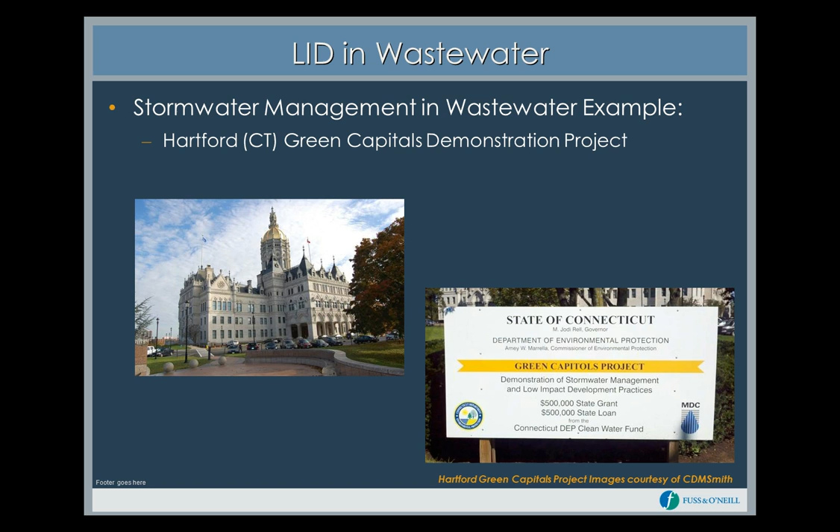And then low impact development in wastewater - how do you do that? That's a good question, because wastewater is not stormwater, but there are opportunities for stormwater management LID in wastewater. There's a project here in Connecticut, the Hartford Green Capitals Demonstration Project, a $1 million project paid for by the Connecticut DEP Clean Water Fund, their Clean Water SRF, and it was applied to the roof leaders that were connected into the sanitary sewer system.

So Hartford is a city that has a combined sewer system, so rainwater typically enters into the sanitary sewer system. During times of very high rainfall, the combined system can't handle the flow, so it will discharge combined sewer material directly into the rivers, which is obviously a very bad practice, but many of our older cities have combined systems, so they need to figure out a way to manage these CSOs.

So this is using LID, which has some opportunities for application. It won't be in every case, but this was a great demonstration project. Some of the things they used here at the Capitol were porous pavement, which you can see going around clockwise on the photographs.

There's porous pavement and rainwater harvesting. That tank being loaded in is essentially a large cistern, equipped with pumps for pumping the rainwater out. Afterwards, they use it for irrigation. There's a rain garden down in the lower right, and a green roof was also used.